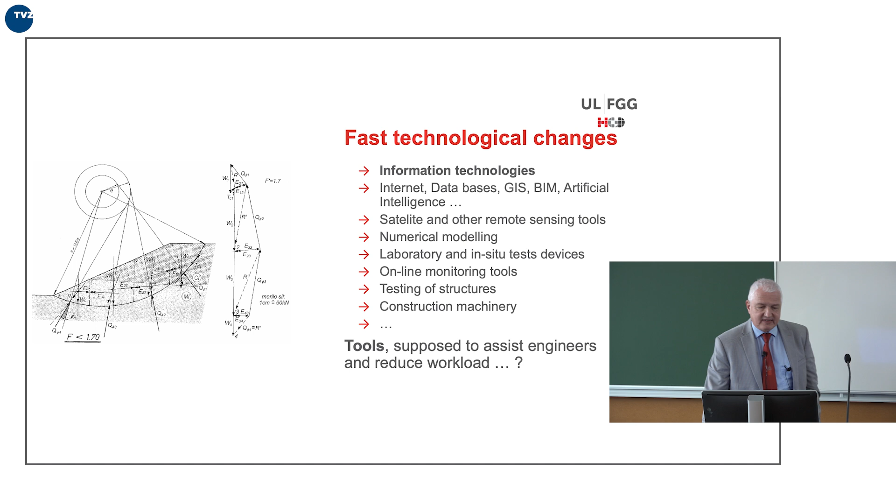So what do I mean by forensic geotechnics? It's basically about explaining why something happened and why the behavior of a certain geotechnical structure was different than expected, or why failure occurred. Why was the effect on nearby structures or pipelines higher than expected, or what caused a certain discrepancy or change in behavior or property. Forensic may also include legal aspects, court issues, so settlements of disputes.

This is something that I was involved in, not many times, but sometimes, and this is the least pleasant side of the story, and I will not talk about that. So the purpose of forensic engineering is basically to find the reason for non-compliant behavior, but also to get experience from documented past experiences for future projects. Usually, when something went wrong, we have to design the remedial measures, and when things go to court, attribute the responsibility.

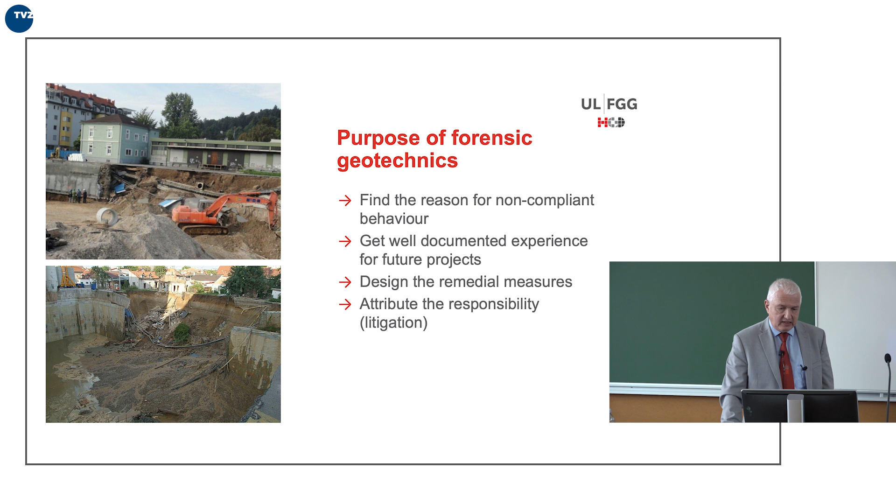We are here to keep the memory of great Professor Nonveiller, and I chose the topic on forensic geotechnics because there is a fil rouge of Professor Nonveiller's professional life, and it's the explanation of what happened in the Vaiont landslide, why this was triggered, and so he tried to explain the behavior.

I believe that most of you are aware, but I will shortly repeat this story and present the role of Professor Nonveiller as I see it, and I might be wrong because I didn't know him very well. Although I met him once in Ljubljana, he was there at the committee for a defense of a PhD thesis, so I was able to meet him at least once at the beginning of my career.

So Professor Nonveiller wrote about this major geotechnical disaster from '63. This disaster happened on the 9th of October in '63, and the same year he already wrote a paper, I believe this was in Građevinar. And until '92, so for 30 years, this event kept him busy.

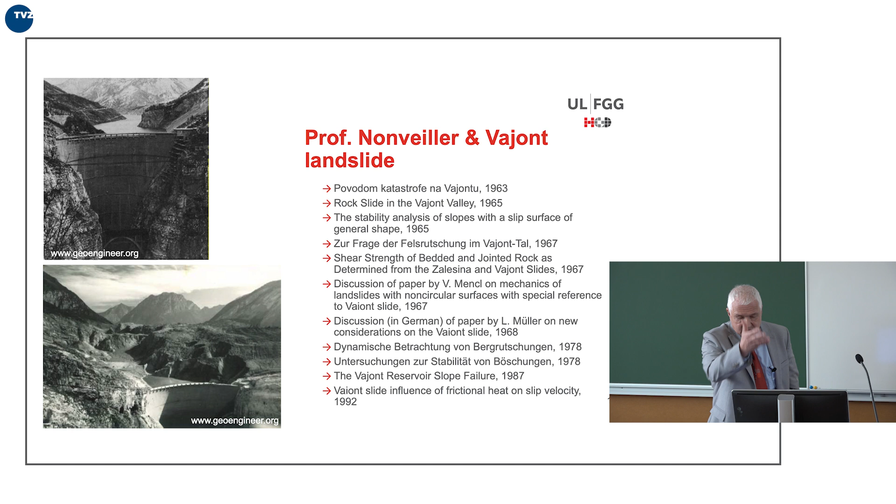And also he spoke fluently Italian and German. And since Austrian engineers were present and some reports were in German, and it's located in Italy, so there were also Italian experts, he was a perfect man, besides, of course, his professional knowledge. So he wrote 11, 12 papers on that which we can find listed in the beautiful book that our colleagues published.

And here you see the Vaiont Dam. It is a concrete arch dam of 262-meter height. And this is before the landslide, and this is after this disaster. So you can see that a massive amount of rock and soil slid into the reservoir. And you can see it here with the data.

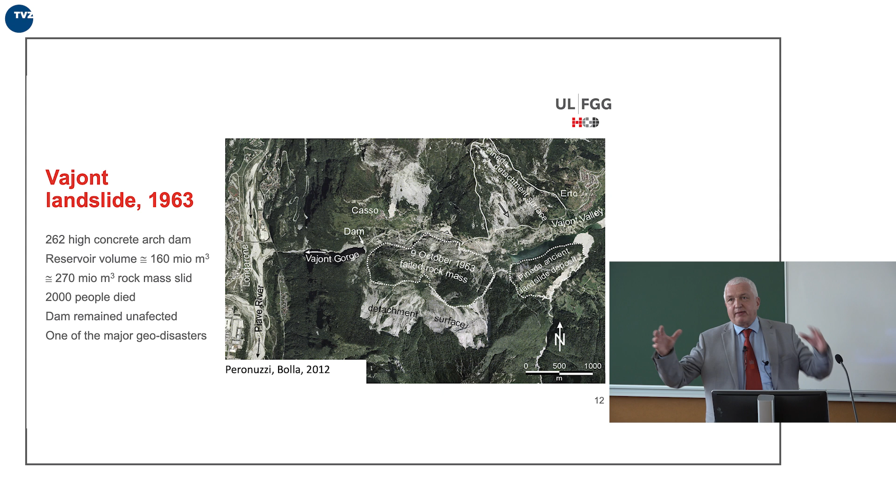So the reservoir was supposed to have 160 million cubic meters of water, and the rock mass that slid into this reservoir when it was not completely full, but close to that, displaced about 50 million cubic meters of water, and with the splash of water being supposedly 250 meters high, literally flushed away the village here. Here's the dam, here's the landslide, and here's the village of Longarone.

So it killed about 2,000 people. The dam itself remained unaffected. And this is still considered one of the major geotechnical disasters worldwide. It's still attracting interest of researchers, so there are still papers published on that. We have heard about the importance of engineering geology, so engineering geologists try to explain the previous situation, how the evolution of this space was, geologically speaking, what was here before and what was the cause of the landslide.

Professor Nonveiller went there, collected all the data, and analyzed them by himself. I think this is so important: as geotechnical engineers, when we want to explain what happened, we really collect all of the data available. Don't leave out any number. It may not fit at first into the picture, but we have to understand which data are correct and which are maybe misleading. And it's so important that we do this process really by hand, I mean use an Excel spreadsheet to make curves like this one presented in Nonveiller's paper in '87.

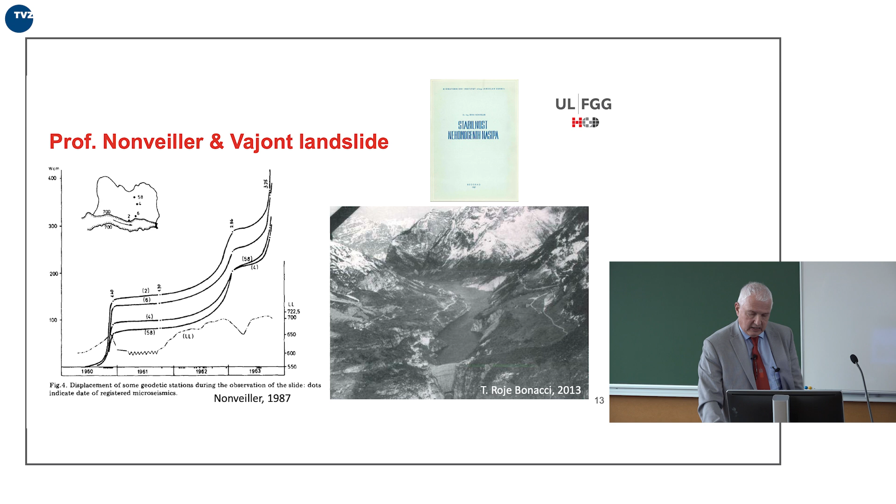There was also a nice paper from your conference in 2013 by Professor Tanja Roje-Bonacci about the role of Professor Nonveiller in explaining this event. So Professor Nonveiller was actually the first. Imagine, there was a project, the dam was constructed, they started filling the reservoir, but nobody did tests in the laboratory. Of course, the advantage of forensic engineering is that later he was able to see the material along the slip surface, take samples, and test them in the laboratory to get the material properties.

He was first to make a systematic stability analysis. And later, because one question intrigued him a lot, why this movement was so fast, he started to think that maybe the friction of a massive amount of material traveling downwards generated heat. Heat turned the water into vapor, and so there was a pore pressure buildup, vapor pressure buildup, and he also considered softening of the material along the slip surface due to this extreme heat.

And not only did he think about all this, but he developed an analytical method to calculate the rate, the speed of the traveling landslide, and came up with the final number. So it is amazing. We have already heard many things about Professor Nonveiller, but it really shows a man that was into the topic. He was fully engaged. He did thorough and systematic collection and analysis of data. He did additional in situ observation and laboratory testing on his own, with his group, of course.

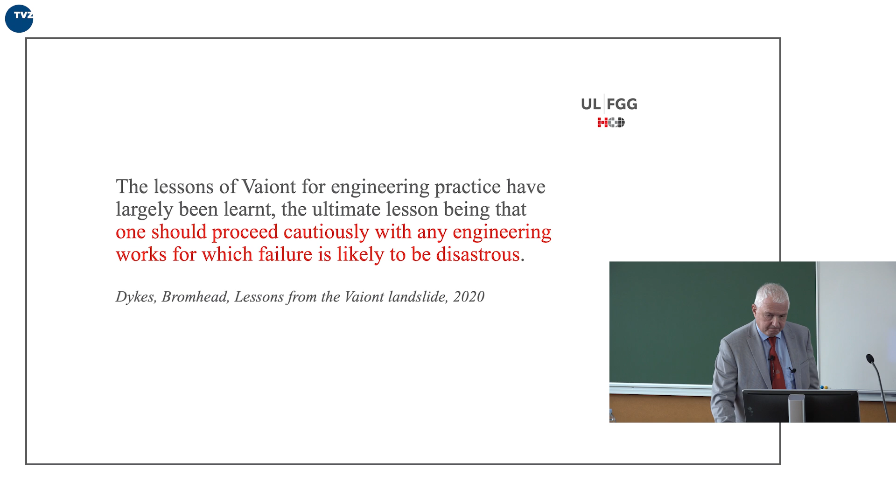Okay, now to the topic that we discussed in advance. So floods in Slovenia on the 3rd and 4th of August, well, till the 6th of August 2023. There was heavy rain, up to 300 millimeters in the whole 3 days, but most of this precipitation occurred within 6 hours. So 2/3 of the country was affected. Remember, it was August.

I was in Lukoran, on Ugljan, on my holidays.

It's not usual; we usually have this in autumn. Over 13,000 houses were damaged. 8,000 people were evacuated. 350 families have had to move permanently. 4,000 kilometers of watercourses were damaged. Nearly 2,000 kilometers of road needed refurbishment, and thousands of landslides were triggered. There are estimates of about 10,000, but it doesn't really matter. There are probably around 350 to 400 that will need some kind of attention and engineering approach.

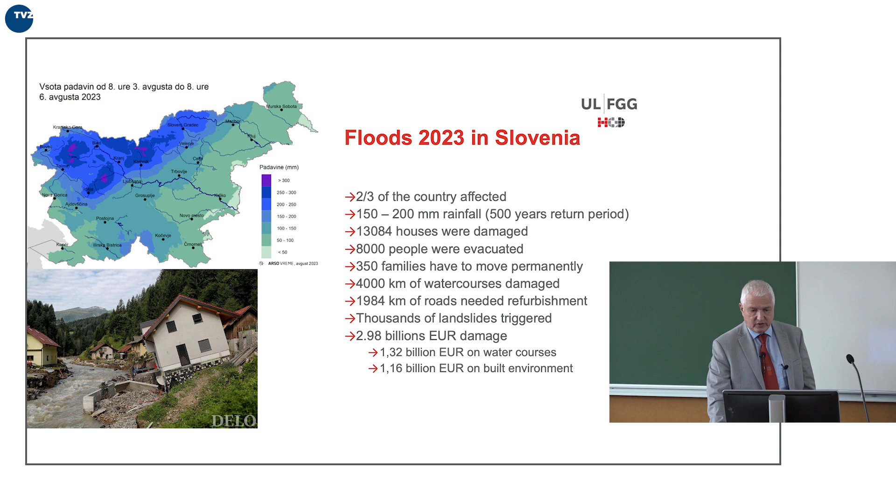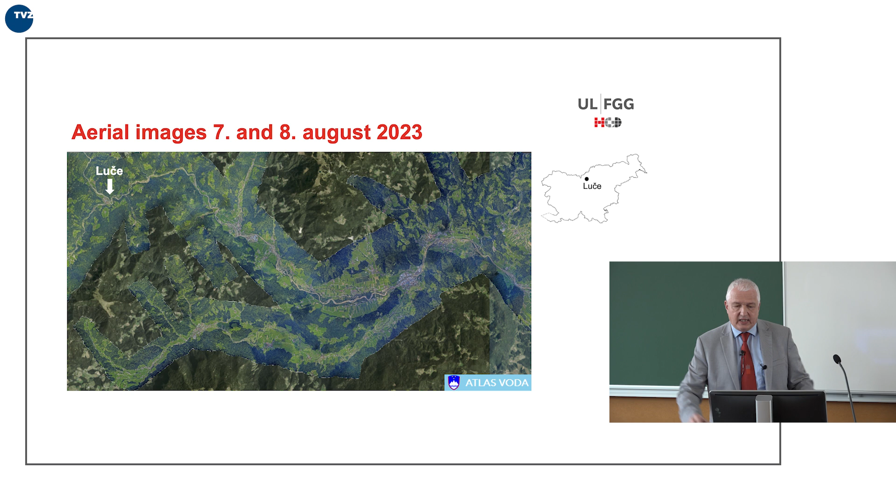So one good reaction of the government or governmental agencies was aerial imaging of all the areas affected. Along the watercourses, we can see another color of the photo. This area around the watercourses was documented using aerial images immediately, within a few days, on the 7th and 8th of August. So we have a frozen image in time, and we can always go back and see what happened within these documented areas.

Many of those don't affect anything, they're just in the woods or on free green fields, but some of them affect buildings, roads, and so on.

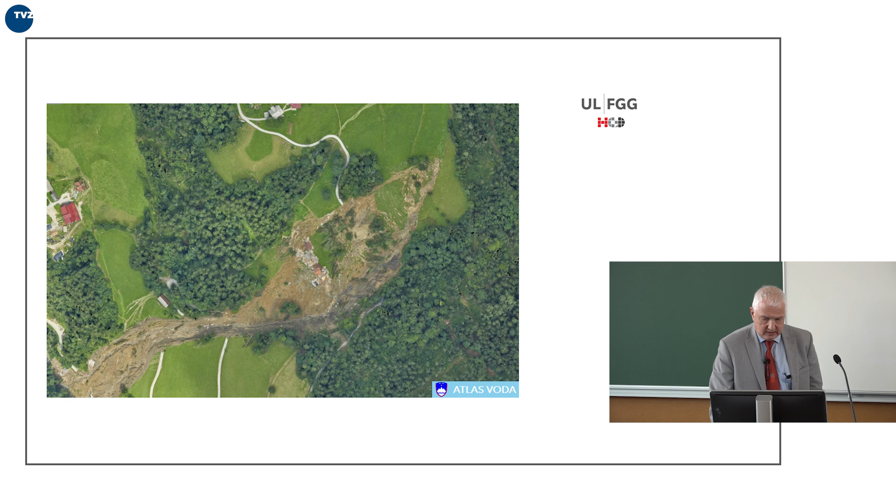At the end, the result for this house is here. And of course, the people had to move.

I didn't mention the reaction of civil protection, which was so good that despite the severity of the event, only, sorry to say so, only 4 people lost their lives.

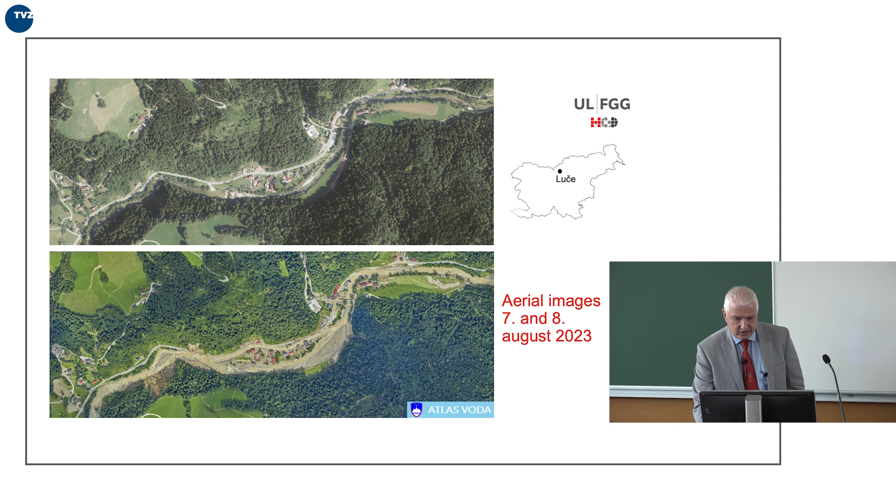A little more in detail: again, this is the location. This is the picture after the event, and you can see how the water split here into two different courses.

If you followed the news at that time, most of the pictures of these tilted houses came from this village. Well, the story is that this village wasn't here before 1950. There was nothing.

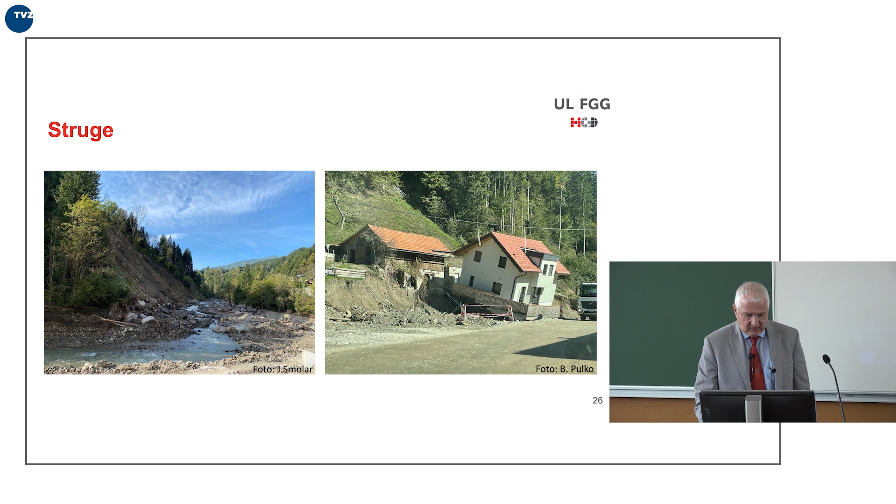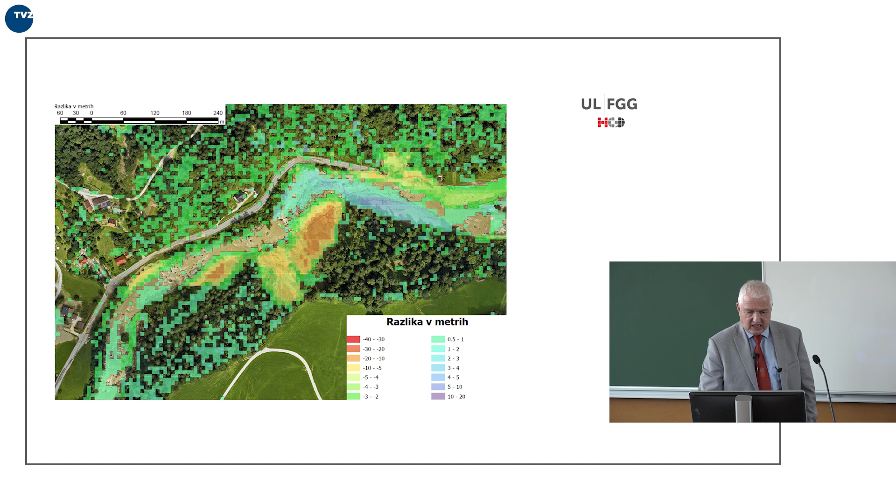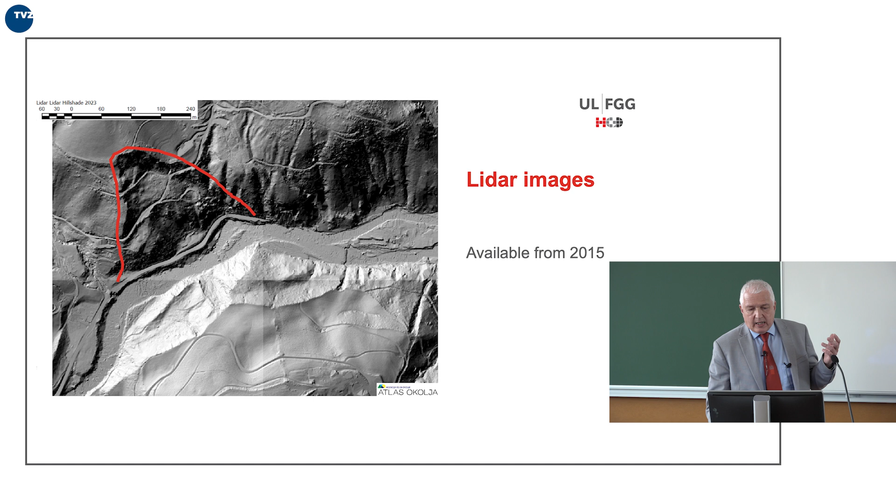LiDAR images are so interesting and good to use. We have the entire country of Slovenia covered with these LiDAR images from 2015, so now it's about 10 years old. They're now doing the second series of images, which will be available, I suppose, within a year.

And this is so good, you know archaeologists use this technology to look for ancient remains, since such fine details can be seen. Here we can see that the area from which this particular landslide was triggered is an old slide, an erosion process going on for hundreds of years or even millennia. This was just one event in a longer sequence in geological history.

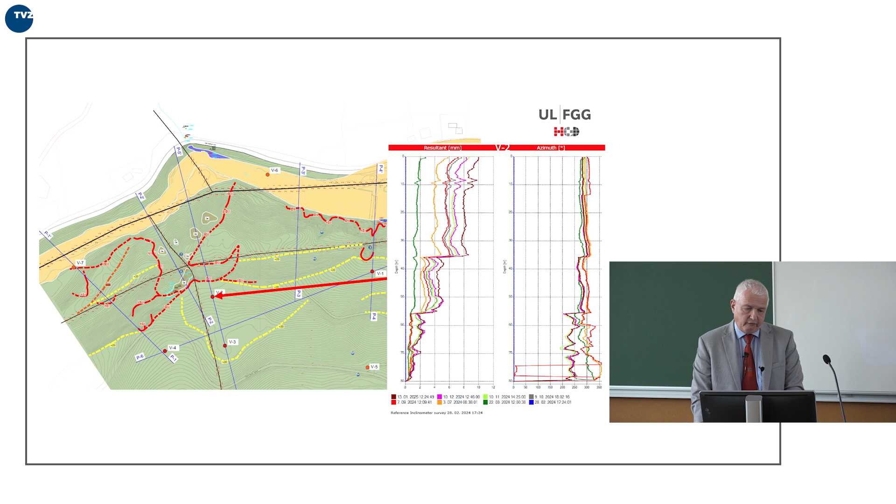It's a disaster in the eyes of humans. We can also see previous landslides using this technology, it's amazing, you really cannot miss it. These LiDAR images are great for our profession, and I advise, or better say, whenever I have to go to a site, I first consult all the publicly available data to see if anything can be understood from aerial or laser scanning images.

If I show you this location again, here, you don't see anything, it's just forest, you can't see it like that. You need the LiDAR image where the trees are filtered out, and then you can see the morphology of the ground.

This particular landslide was already investigated. Some 7 boreholes were drilled, and piezometers and inclinometers installed, and this has been going on for about 1 year. We can see, for instance, the image of the inclinometer here on the right side is located here.

It shows relatively clearly that, although there is a maximum of 8 millimeters of movement, there are probably 2 levels of sliding, marked here with the red line. The lower one coincides well with the expected slip surface, but there's another level of sliding about 20 meters higher. So one is at about 35 meters deep, the other about 55 meters.

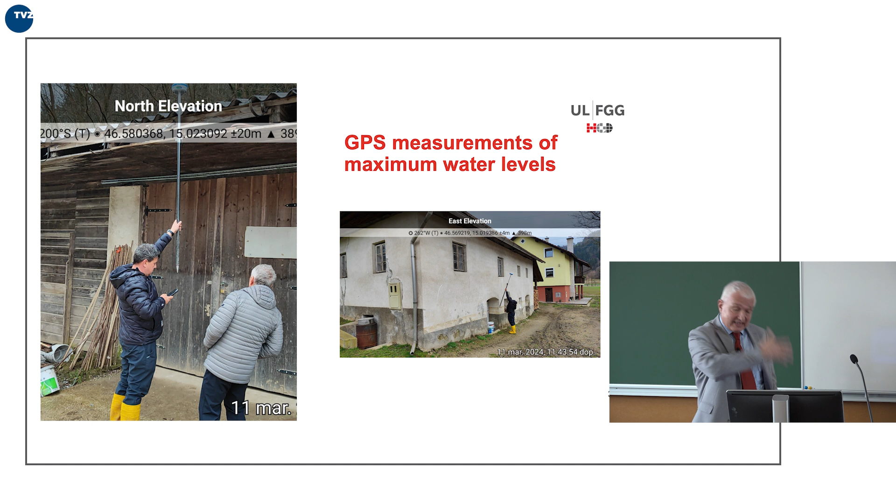Although today it's much easier - we have GPS devices, so taking readings and documenting them into databases is much faster today - but then it was done, and now it was not, which is a pity.

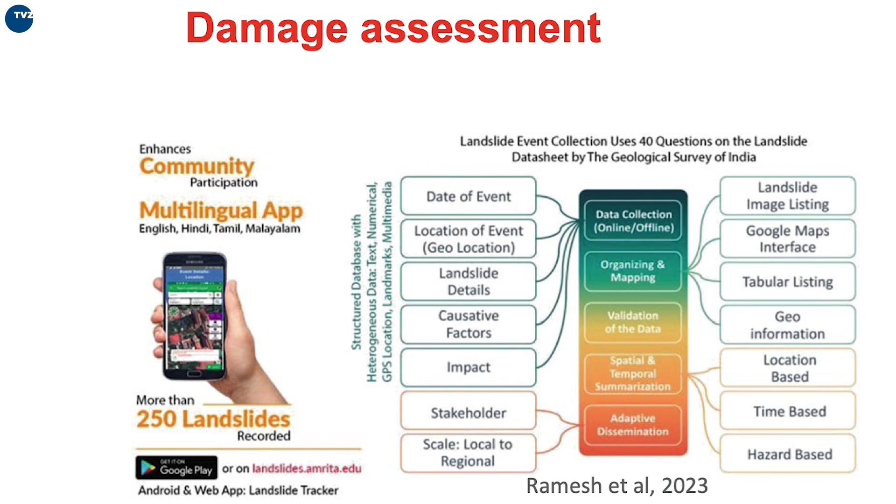So today, where we all have the gadgets in our pockets that can document location and take pictures, we didn't take advantage of that. Today you have apps for everything, and you can see here we have codes and technical options to document landslides or any disastrous events.

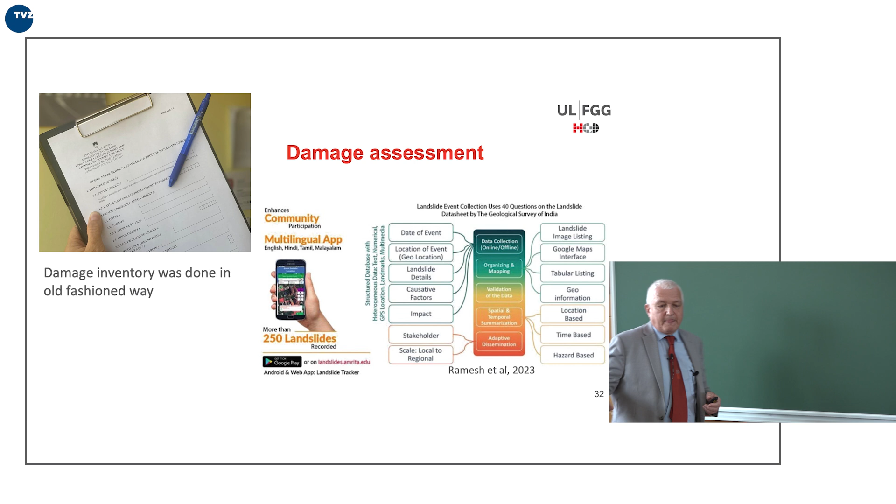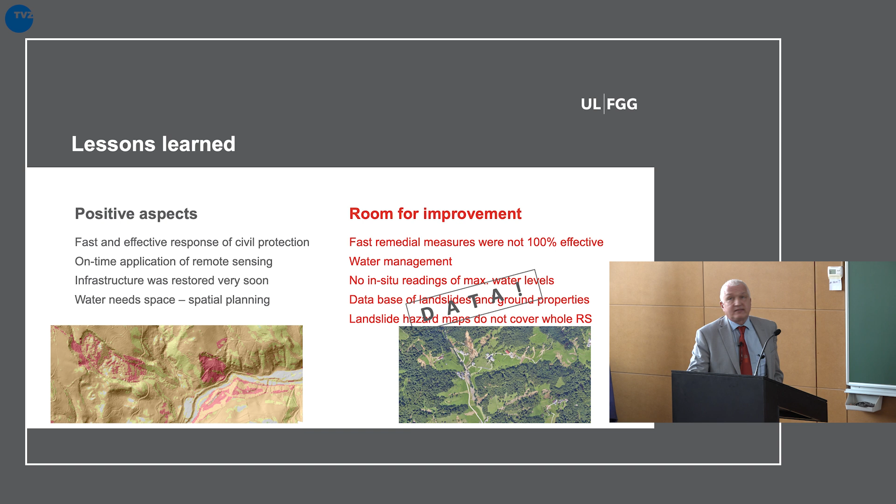So speaking about the positive and the negative, let's say I'll place the room for improvement - there is always room for improvement. Positive aspects were, first of all, fast and effective response of civil protection. This was so important, people were not left alone, and it was really effective. Then, on-time application of remote sensing, so we documented the situation.

This is good. The infrastructure, mainly the roads, were repaired very, very soon - trafficable again within days and weeks. And we learned that water needs space.

We cannot build our houses, factories, anything else - our built environment - and use all the space that was by nature devoted to water. Water needs space. It will take it anyhow.

My colleague Rok Fazarinc, a brilliant mind, says people used to say the old people know where we should or should not build. He says, well, it's not completely true. The truth is that what was not built in the correct location doesn't exist anymore.

So where is the room for improvement? Some fast remedial measures done by civil protection did not survive the next floods, which were much less severe, occurring just 2-3 months later in October and November 2023. So many of those failed. When something is done fast, it may not withstand the forces of time.

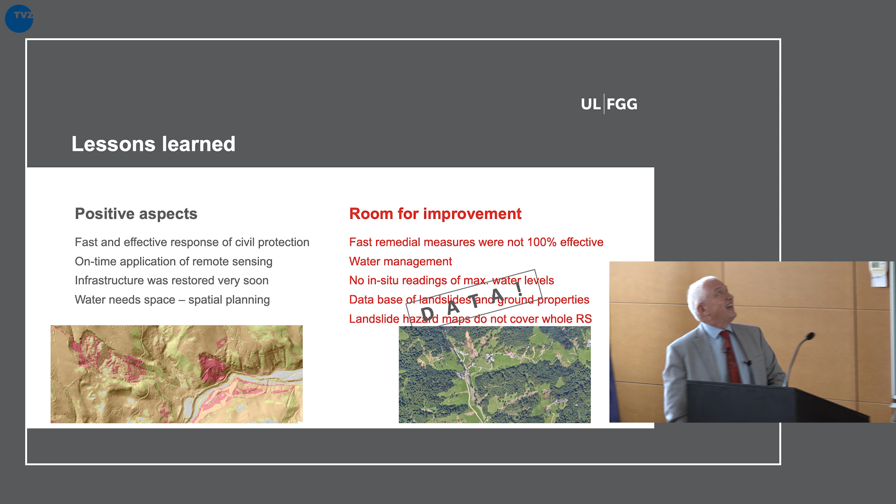I cannot come from Ljubljana without mentioning the marshland. So let's go on to the next slide.

So you know where Ljubljana is on the right side, and we have this yellowish area in the center, which represents the marshland. A few thousand years ago, 5,000 to 10,000 years ago, it was a lake. The upper 20 meters are filled with very soft lacustrine sediments. Geologically, this area is a tectonic sink, so the bedrock is located maybe 50 meters deep, filled predominantly with alluvial deposits, gravel, but the upper 20 meters are extremely soft.

On top of that, we have this nice new earthquake hazard map, showing design earthquake acceleration. Ljubljana is in the center. The new acceleration on the bedrock is

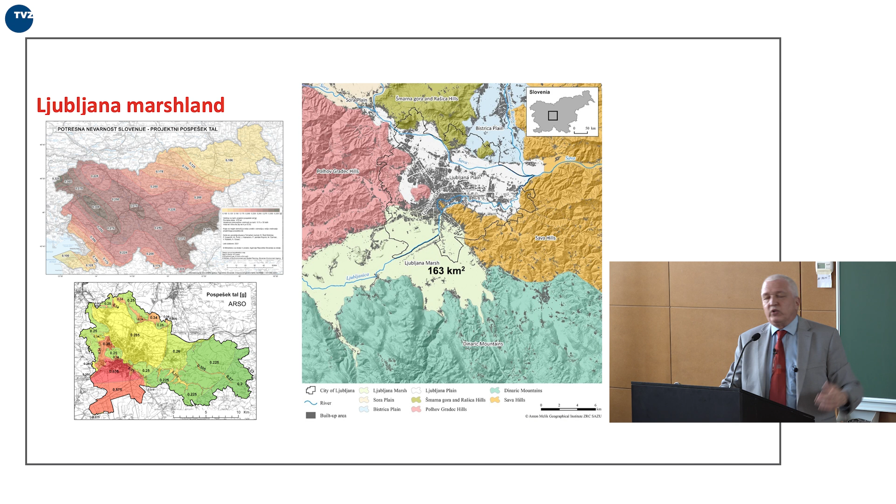0.275, which is a little bit higher than it was before. The map below is not an official one, but here on this southwest area, where this marshland is, colleagues from the Seismological Institute tried to anticipate the acceleration on the surface based on analysis of microtremors. These are extremely small strain vibrations, and the method is based on elastic behavior of the ground, which for such a soft soil is of course not true. But in this way, they came up with a prediction of maximum earthquake acceleration on the surface between 0.2 and 0.6, which is extremely high and definitely cannot be true.

To see how soft this material is, this is a reproduction of a slide made by Boštjan Pulko, but the measurements were done by Anna Gabrc, who is here with us, on the Ljubljana Ring motorway.

They did test embankments - do you still have that option in Croatia? Because in Slovenia, they don't give us the option to do test embankments, test cuts, whatever test. You can test piles, test anchors, but testing the geotechnical structure as a whole, forget it. They say you have all these fancy computer programs, you can do everything.

So about a 5 meter high embankment settled for close to 3 meters. The initial pore pressure, void ratio of this material is around 3, so the moisture content would be over 100%. So this is how soft this material is.

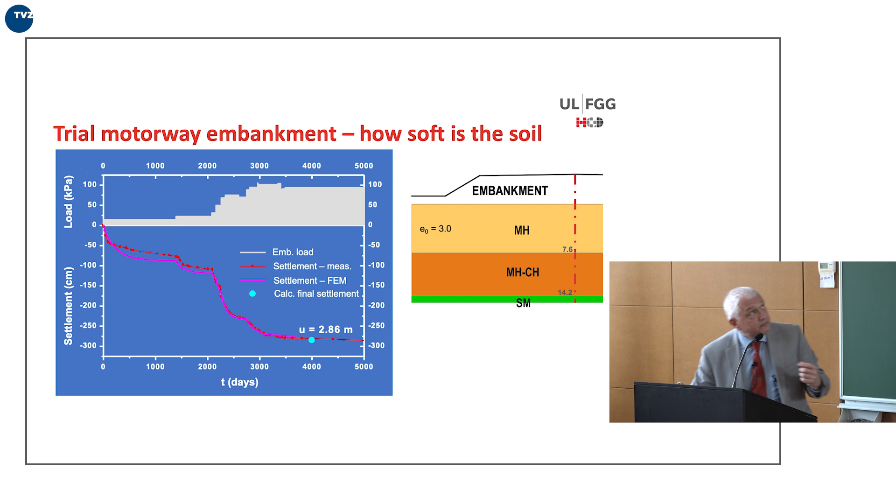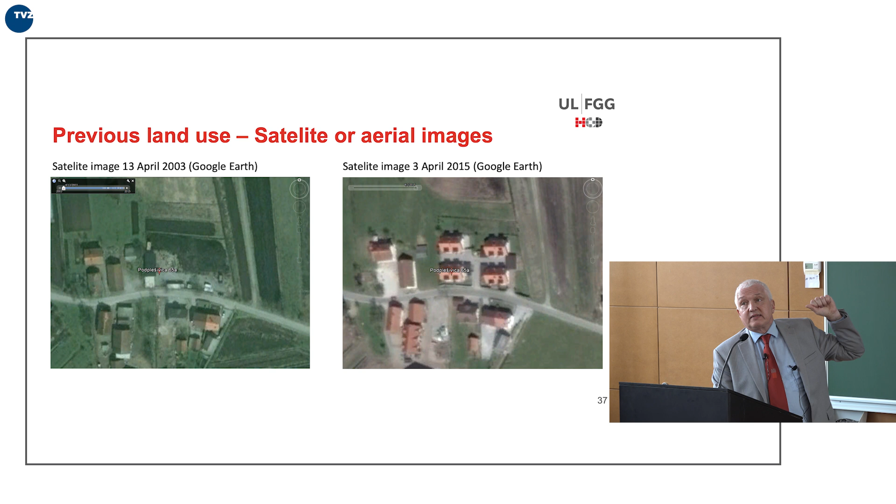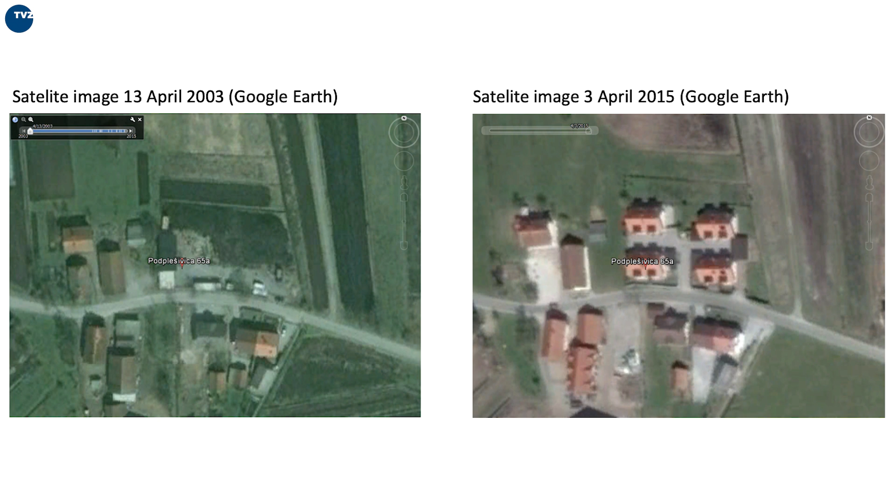From this very soft material, there are a number of anecdotes, actually. This one was not an anecdote, but a real court case. We have these 4 buildings here, and 3 of them perform without any problems. And this one started to tilt, causing the inhabitants problems - windows don't close, and so on. Then we were asked to try to understand what happened, why this is wrong, and attribute the responsibility. At first, we didn't understand.

It was quite nicely done for the private buildings. Each of those had a borehole - well, the borehole without laboratory test, we know it's not quite a lot of data, but at least they tried to do something. So the only thing we were able to do within the budget was to consult Google Earth.

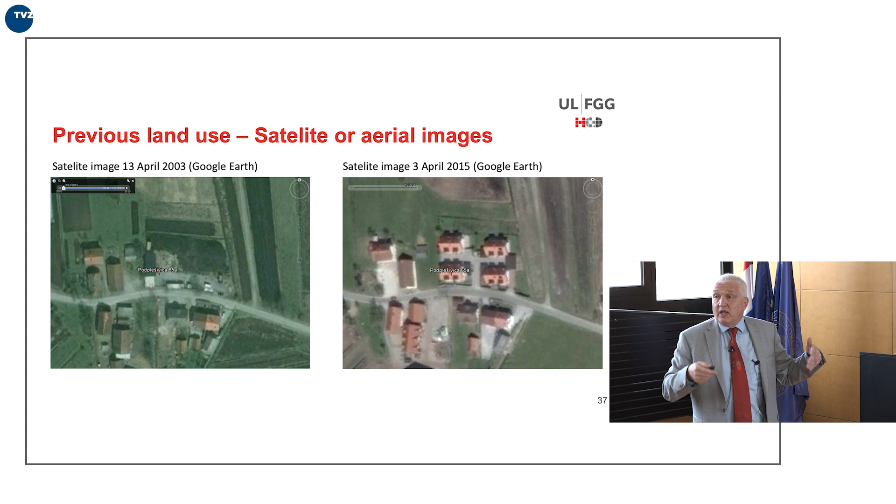And we saw that some years before - you see this mark? This mark is here. There was a previous building, and here was a parking place. We talked to the people, and they said, well, here was a guy having these heavy trucks that were parked here together all the time. So what does it mean? The previous use, the previous loads on this very soft soil caused some consolidation, some previous settlement of this area under part of this building, and the rest was not consolidated yet.

So on such a soft soil, it's so important to understand the previous use of the location, and this load history of the area under this building caused later unwanted behavior.

Today we have this beautiful tool - I don't know if you know it or not - the European Ground Motion Service. It's actually a radar interferometric analysis of satellite images in the radar spectrum. Europe has two satellites, Sentinel-1A and Sentinel-1B, and this is a public service. You can just search European Ground Motion Service, and then you will get this data.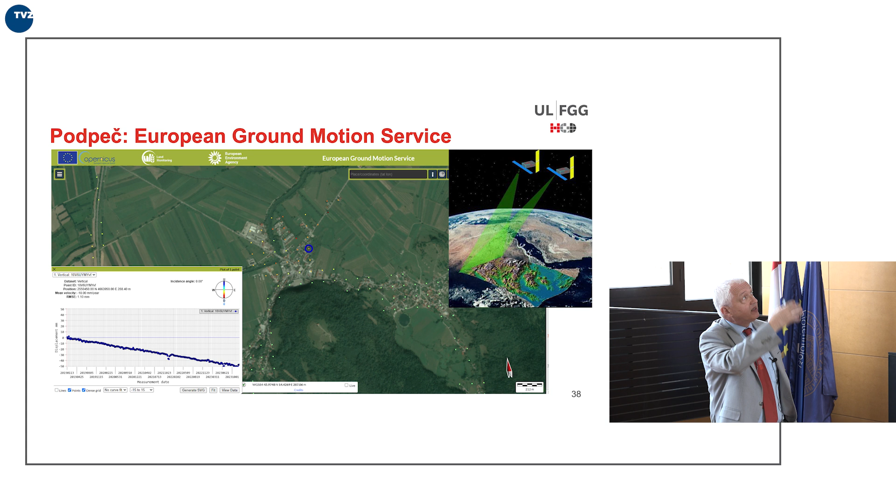Why am I showing these locations? Because right now here is a construction site with some tens of new houses. The owner, the client, didn't want to put these houses on pile foundations, on deep foundations reaching the higher bearing stratum. Later on he wanted a confirmation, he wanted the contractor to promise that after he hands over the buildings to the future owners, there will not be more than 2 centimeters of settlement.

And the contractor went to me and said, well, how should I react? And I just showed him the first point adjacent to this construction site and said, all right, look, this is the natural behavior of the marshland here. It's 1 centimeter per year. You do nothing, you have 1 centimeter per year. And now you imagine, what are you going to sign? I don't know what the discussion was later. The construction is going on, and well.

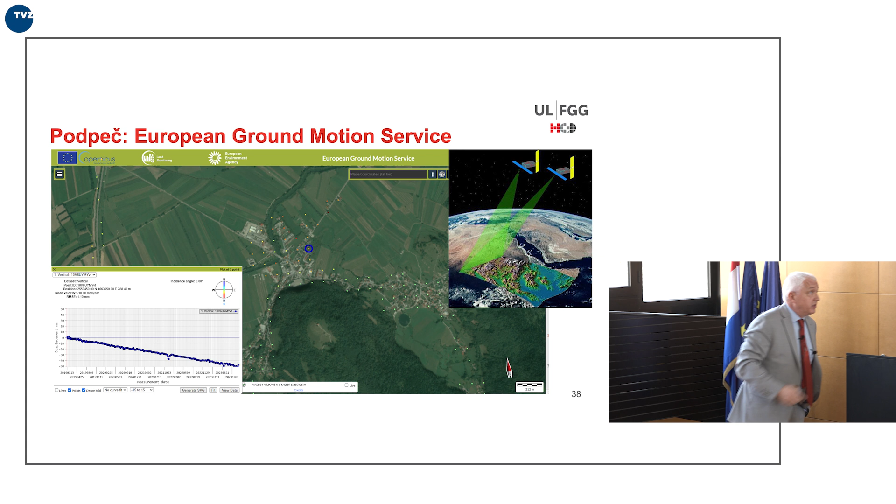Speaking about some new technologies, I know that the flat dilatometer test is also used in Croatia, and with the addition of the seismic unit, you can measure also the G0, the shear modulus at very, very small strains. You get quite a good first profile of stiffness and strength, and then of G0.

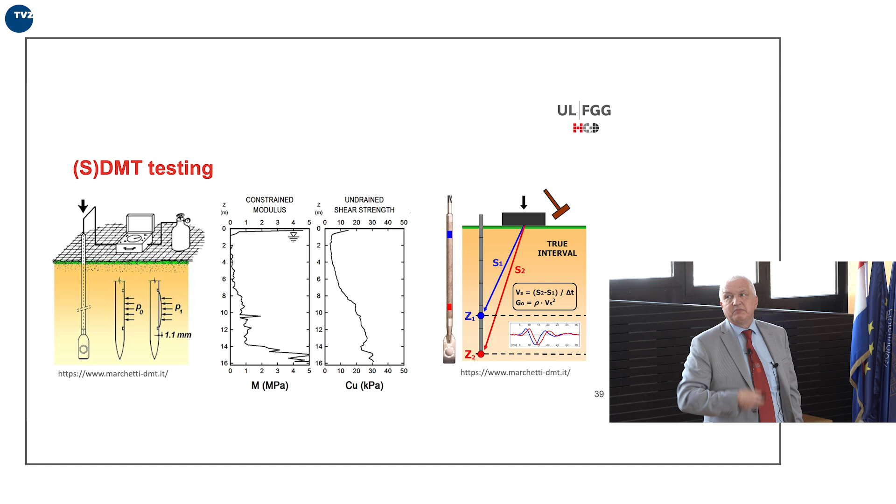So this is probably one of the best tools that we have, at least for soft soil, clays, silts, and sands. We can have a whole profile. The measurement is taken every 20 centimeters, which gives you a good profile, together with a few laboratory samples, so you can compare and see. You can do a very good prediction, even about the future sometimes.

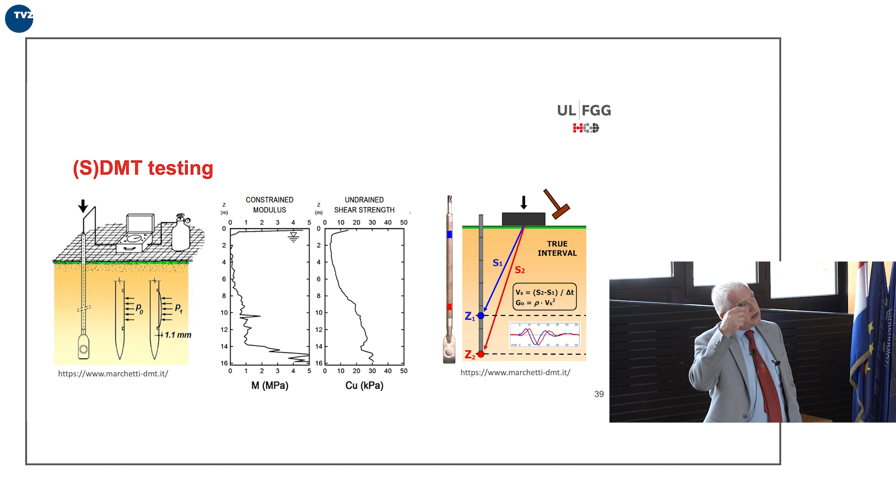Well, and I cannot resist mentioning the resonant column test device that we have, and the work of our PhD student, who is also ill and is not here, Timotej Jurček.

Our idea was, as I showed you initially, we have very soft soil, something special, not too extremely special. There are even softer soils in the world, but for our region, I think it is one of the interesting places. And we have high seismicity, so we really wanted to know how this material behaves in this small strain range. And the question was, how does this stiffness decay curve look like? Because based on these two curves, we can anticipate the amplification of earthquake acceleration traveling from bedrock to the surface.

This curve can be described by this analytical expression, and the only parameter is actually gamma 0.7. What is this gamma 0.7? It is the shear strain at which G0 is reduced down to 70%. So I will just give you the result. We have a set of proposals from different researchers on what this gamma 0.7 should be, based on investigations of different soils. And we have mostly used this EPRI curve, this one.

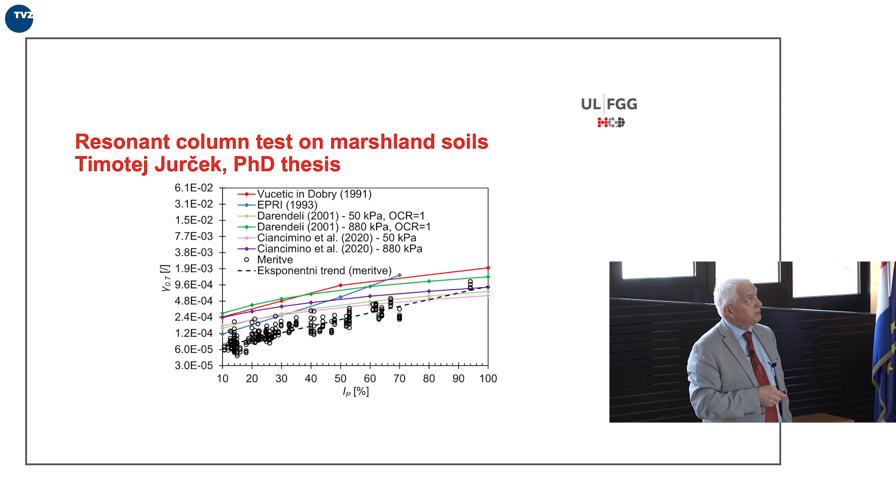Sonia mentioned that I did some work on ground anchors. And again, just a short introduction so we can follow the further slides. Ground anchors are tested. Actually, each ground anchor is tested, and by different tests. So you have acceptance tests, suitability tests. So the investigation of an anchor is done in several stages of loads, and at each stage of load, the force is maintained constant, and then at the anchor head, the displacement is recorded.

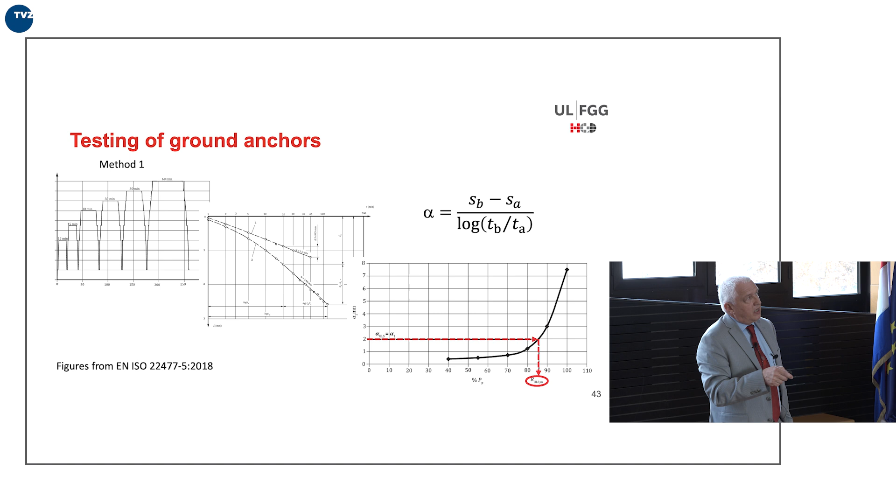And if we plot it against the logarithm of time, then we can calculate this so-called creep coefficient alpha, so difference in movement divided by difference in logarithm of time. The bearing capacity of an anchor is determined as the force leading to a creep coefficient equal to 2. So a creep coefficient equal to 2 means we are at the limit of the bearing capacity. We have achieved the bearing capacity.

And now again, forensics, yeah? There was a construction site, and it was a particular one. It was in the Flysch region where this kind of construction was designed. So we have these prefabricated reinforced concrete elements. Each of those had the place for one anchor, and since the earth pressure was relatively low due to good properties, the designer decided to use 2-strand anchors, so just 2 tendons, 2 steel strands for each element.

When we do testing of anchor behavior before the systematic installation of them, we usually try to see how much bearing capacity we can achieve, and we usually add one further tendon. So these were 3-tendon anchors tested, and these are the 2 triangles. Effective free length against the creep coefficient. So the creep coefficient was around 0.6.

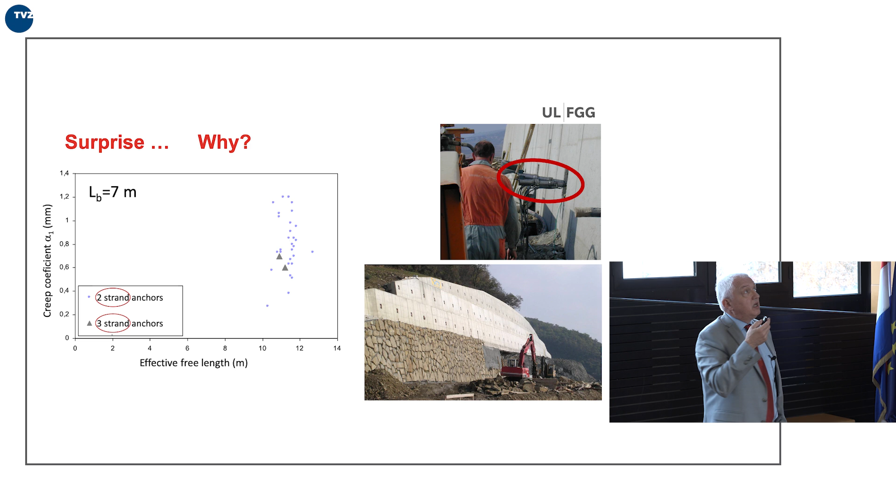When they started to install the regular anchors having 2 strands, they got all this range of creep coefficient, even going up to 1.2, which was by the design not acceptable, and they asked what to do. Well, these anchors were installed, they worked perfectly, no problem. But the question remained. So it was triggering. Why those numbers?

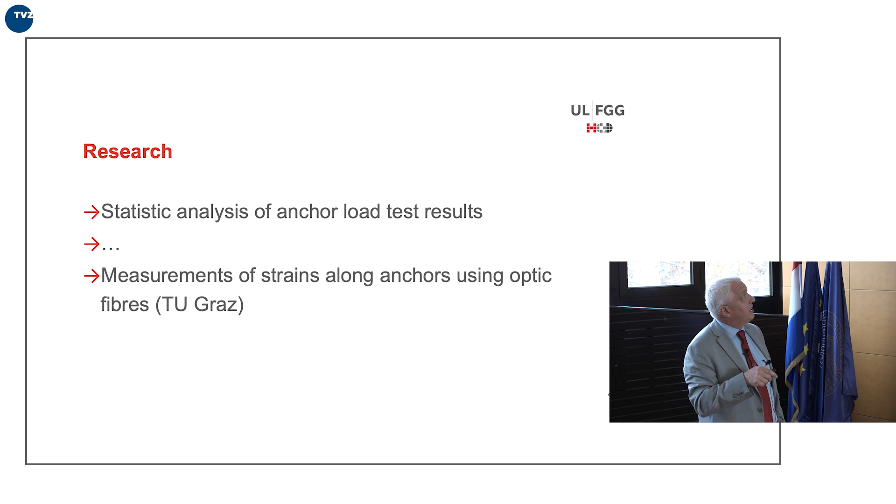So we went back, collected a lot of anchor test results, did a statistical analysis, and then we were happy enough to be able to at least remotely participate through this bilateral research project, a minor one, with Technical University of Graz, who did some tests. So let's see first this statistical analysis of anchors. So what we did is a regression analysis.

So creep coefficient was written as a function of force, of free length, of bond length, and of number of strands, number of steel tendons. And all these factors that resulted from this regression analysis were statistically significant, highly significant. So no doubt that this is valid. For anchors, if we take now as a reference anchor the one having 4 strands, 15 meters free length, 7 meters bond length, and 800 anchor force, this equation would give the result.

So one additional strand, so instead of 4 having 5, will reduce creep coefficient by 49%, which is interesting, isn't it? 1 meter shorter bond length reduces this factor by 12%, and even free length, which shouldn't have any effect, well, reduces it by a negligible 1%, but has some effect.

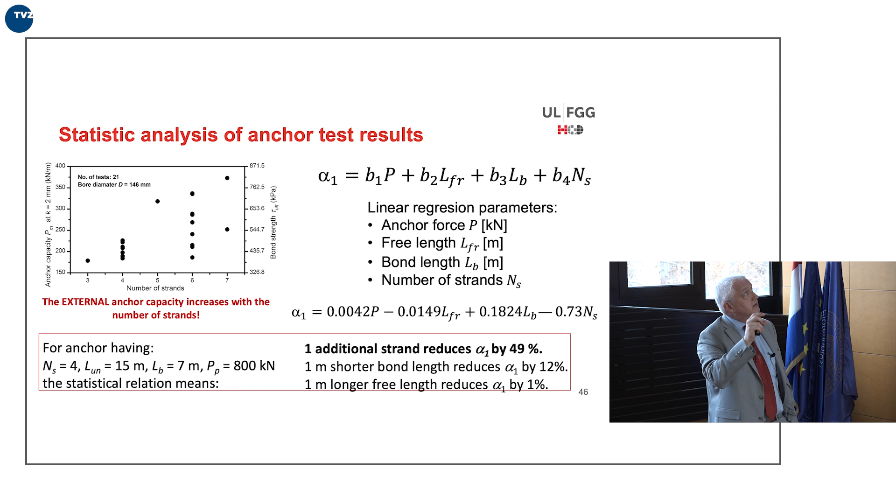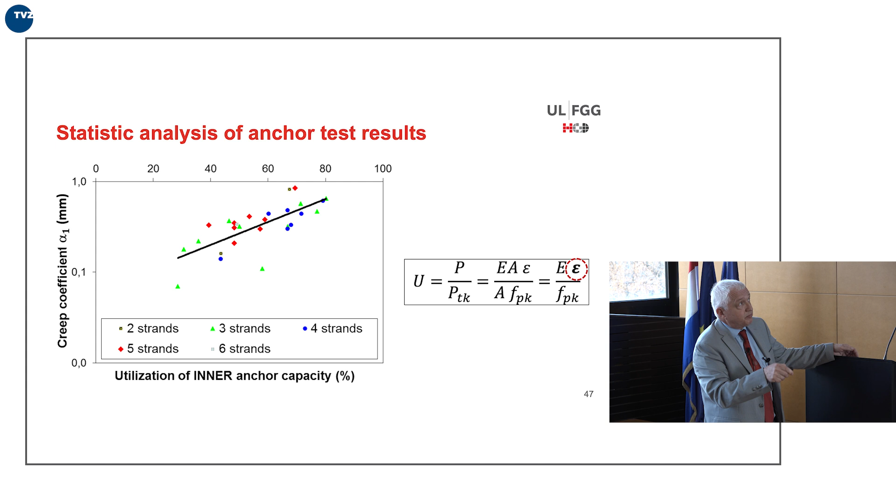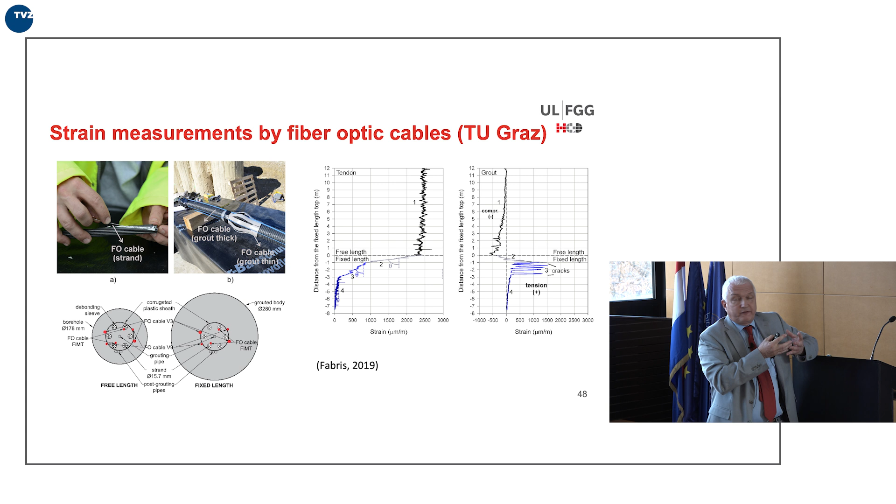If we have a look at what this utilization factor is, so I said force divided by cable strength. Cable strength is area multiplied by strength. Force is a function of strain, actually. And finally, we see that we have 2 material properties of steel, and the rest is strain. So measuring the strain could tell us something. And the colleagues in Graz had the chance to install fiber optic cable along the tendons and within the grout body outside of anchors. And these are the results.

So fiber optic cable can serve as a strain sensor. Each centimeter of the cable can serve as one piece of sensor. So we get the data along each centimeter of the anchor, which is perfect. We did previously some measurements with strain gauges, but a strain gauge is installed once a meter and will never give you the same result.

So along the tendon, we see what is expected. More or less constant force, a little bit of decrease here at the end. So, let's say, a constant force within the free length, and then rapid reduction within the bond length down to 0. Well, this is expected. Nothing spectacular here. More interesting is this one.

So we see here in this area where the load is obviously transferred to the ground, we see these ups and downs. This is actually cracking of the grout. And we see, which is also clear from simple statics, that we must have some compressive stresses and strains along the free length.

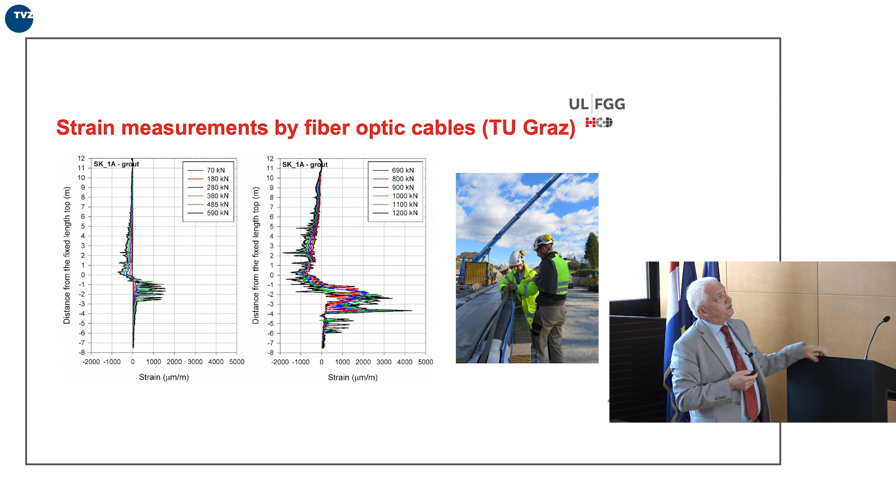So I would say, if we used, instead of grout, a material that does not crack, what would happen? That's a question that can lead to further research and further improvement of, first, understanding and then utilization of anchors.

The more or less last case history: it's a deep excavation in Ljubljana next to a historic building from the monarchy. It was a military structure. So this is this military structure from the 19th century, and this is the new, now already constructed building. But at the time that we were involved in the project, there was a construction pit under execution, and here is this military object. Now it is a school.

So this historic object is over 130 meters long, not so wide, and has 3 stories and the attic, so it's less than around 20 meters high. The construction pit is 13 meters deep, and the retaining structure was designed from 127 jet grouting columns, which were 25 meters deep, 2 meters in diameter, at a spacing of 1.8 meters. Subsequently, during the excavation, they were anchored by pre-stressed ground anchors in 3 levels.

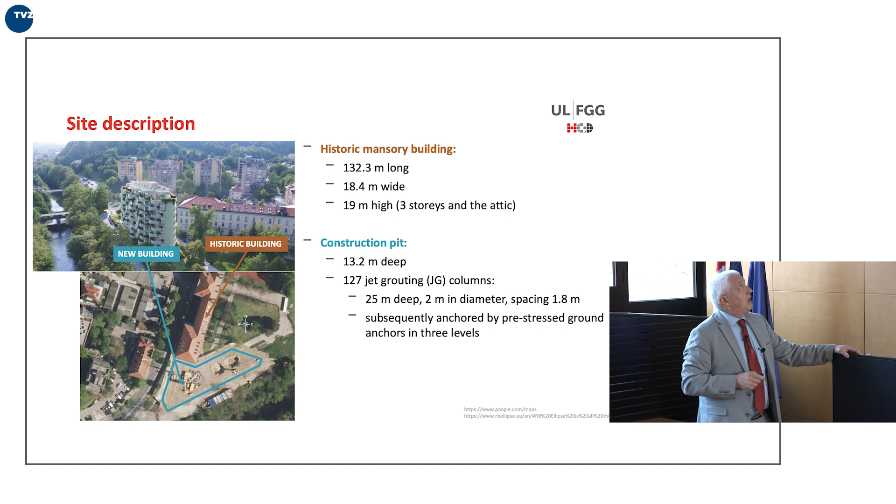We were invited to this construction site when, on 16th of March in 2021, the people from the school informed the contractor that the building started to crack. They had a 0 reading of some benchmark points before the start of construction. Let's only consult those 4. There were more, but these 4 might be important, or 3. So they immediately went to measure again, and they saw that the points that settled most showed a settlement of 37 millimeters. So this was 1 month after construction.

85 jet grouting columns were installed, and those last 5 installed on 16th of March should supposedly cause this cracking. At first, it seems reasonable. We have installation of jet grouting columns immediately adjacent to the building, so one can believe that this can cause damage to the building. But soon after, when they inspected the whole building, they saw that these cracks extended up to 90 meters away from this point. So this cannot be only due to these 5 jet grouting columns.

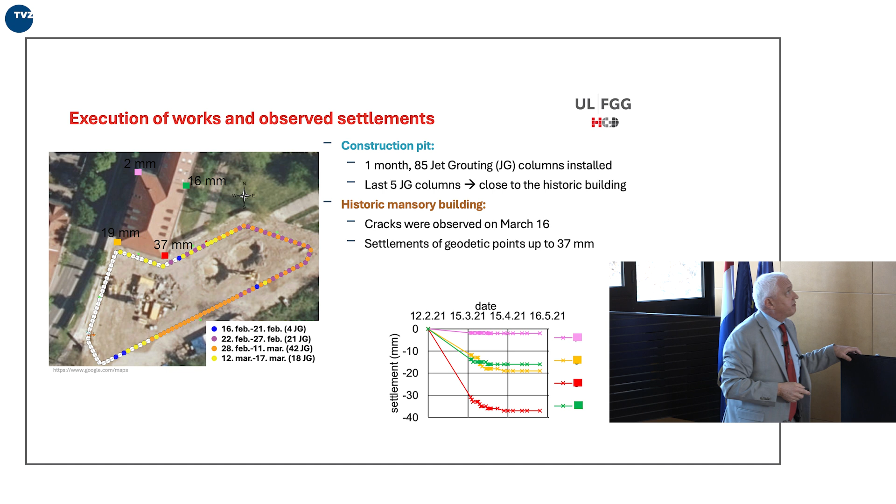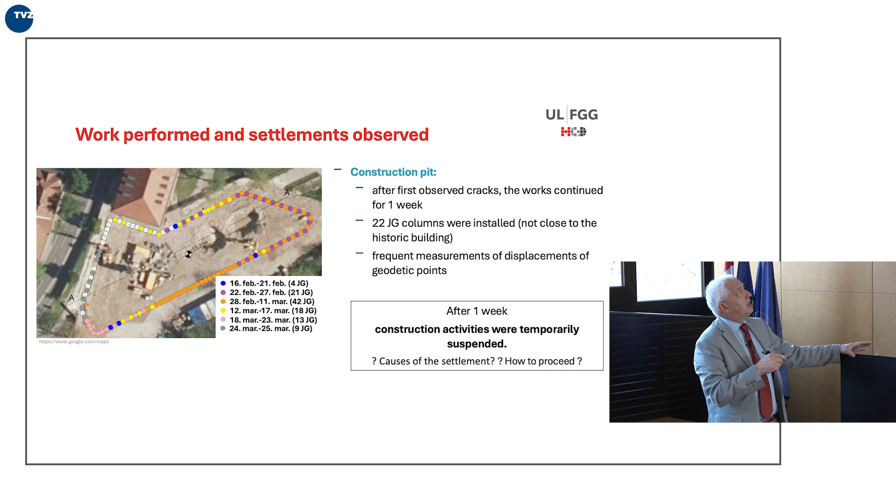But we didn't have anything to take into hand. We only had the 0 reading and the situation after 85 jet grouting columns were installed. So construction then moved from here to this corner. An additional 22 jet grouting columns were installed in the week after that event. And then the authorities, on the request of the school owners, stopped the construction site. They closed it.

What is the ground composition? So we had these 4 boreholes from the design stage, then 2 additional boreholes were made, and this is a picture of the material that was in the end believed to cause the problems. This is a very soft, loose, silty gravel. And on top, we have 10, 11 meters of very, very dense, clean gravel. So a very dense layer, then some intermediate layer, then very soft, very loose silty gravel, and then the bedrock. Bedrock is at around 25 meters, so all the jet grouting columns went down to this bedrock.

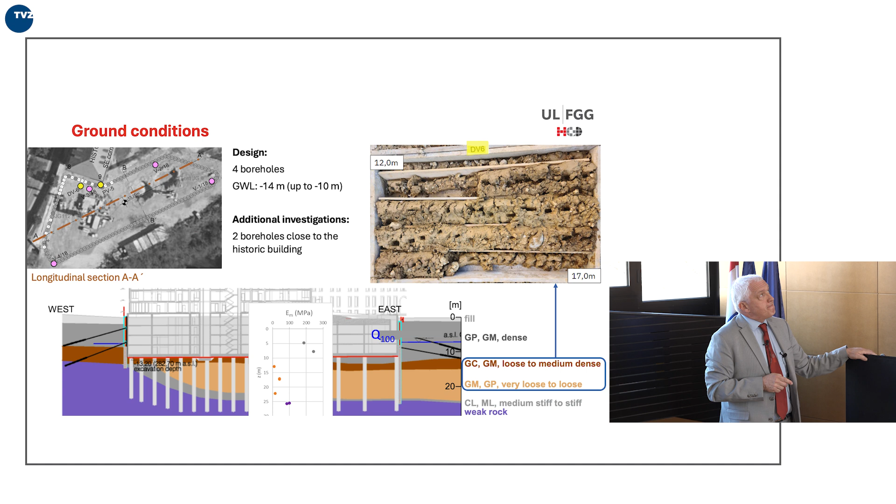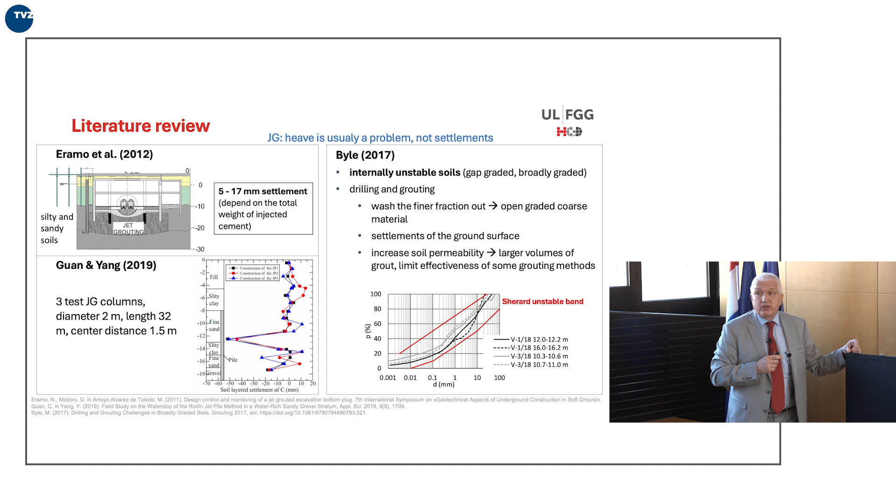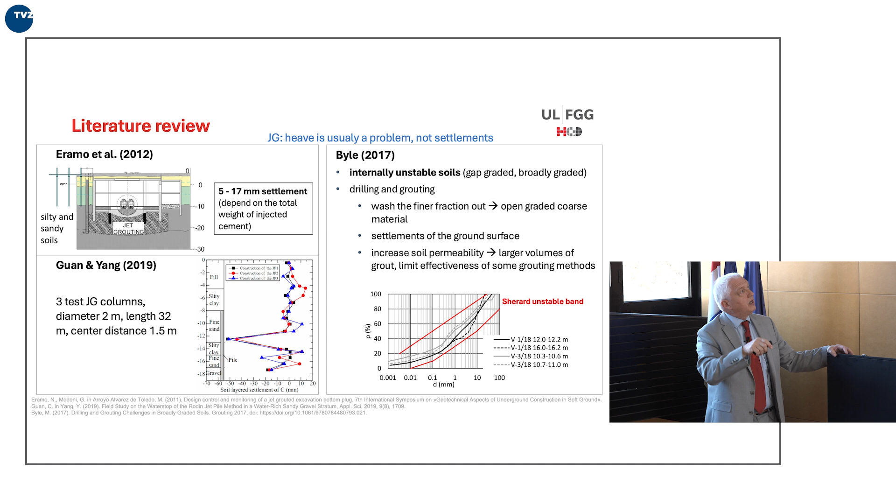So what do you do? You go and consult the literature, and we saw that most of the literature would say that when you do jet grouting, you should be afraid of heave. And here we had settlements. We found just 3 papers speaking about settlements connected with jet grouting. The first one, additional mass, additional load. Well, this was not the case here. Then there were 2, one showing 5 centimeters of settlement in some fine sand on a relatively thin layer. And then the one talking particularly about these loose, silty, clayey gravels, which were known to the author to potentially cause problems with drilling and grouting procedures. So this was one thing that we did.

We did a 3D analysis that showed some difference from 15 to 16 March due to these 5 jet grouting columns, but did not satisfactorily answer all the questions, particularly due to the massive, large construction site and the need for a bigger model. It was impossible to model everything.

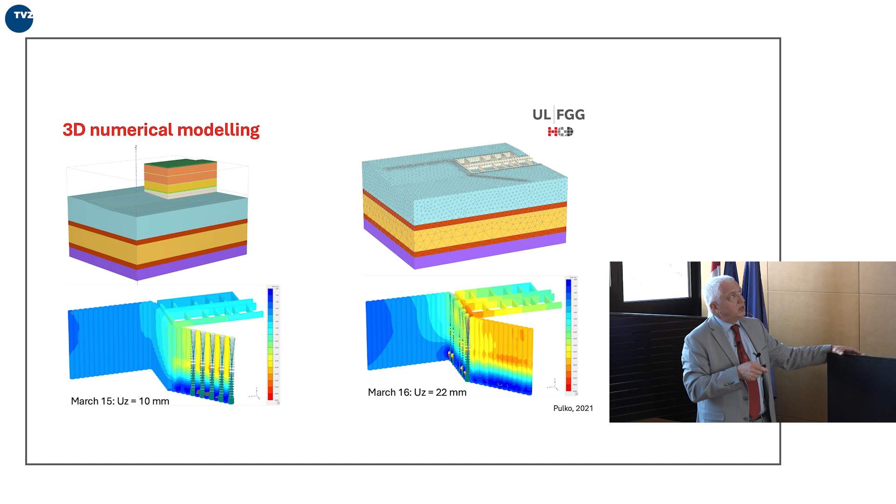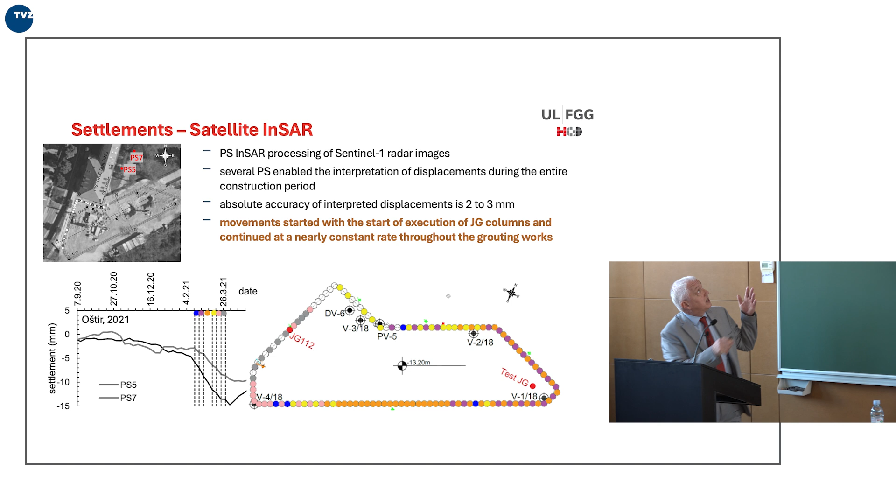And then we have a colleague at the university, a professor who is a physicist, who is able to analyze satellite radar images using interferometry principles. And we asked him, can you have a look if there are some points observed by satellites that can be used for the interpretation of this event? And yes, indeed, he was able to locate 2 points, so-called permanent scatterers, that were monitored throughout this period. And we see that there are negligible or minor settlements before the construction started.

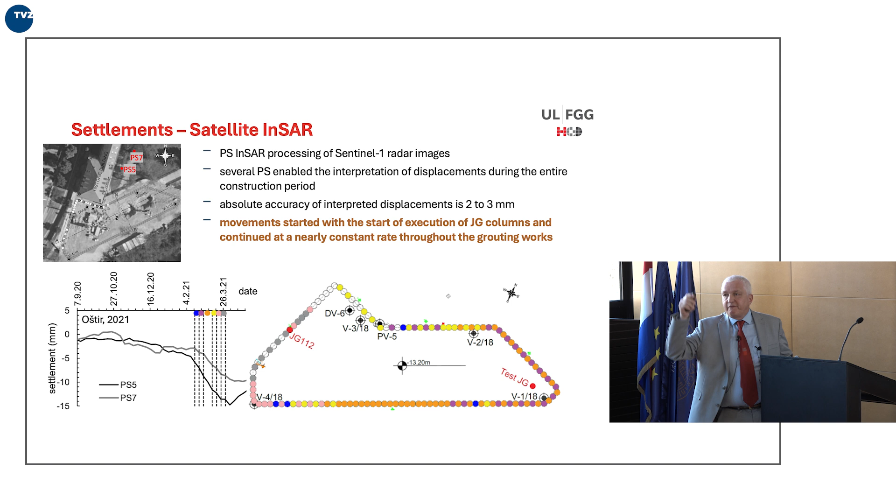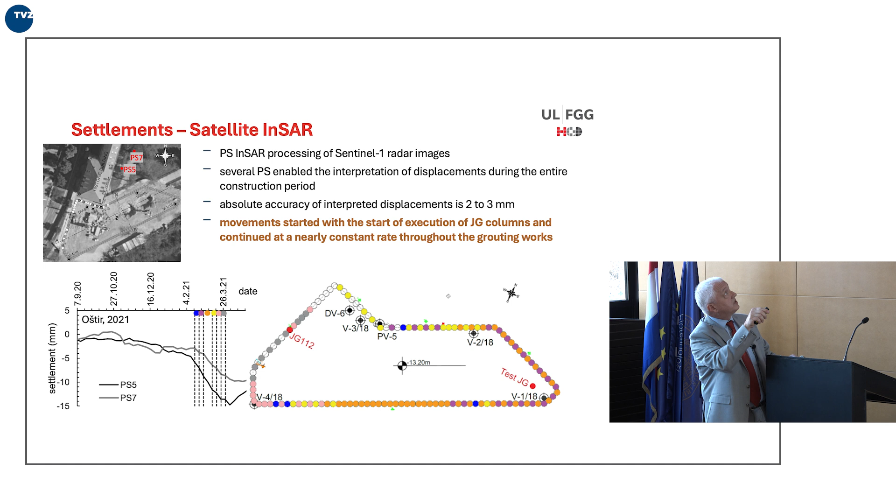These lines with colors are connected with these colors here, so we can see which jet grouting columns were constructed each week. But what we can see is that the settlements started from the first day of construction, and they persisted throughout the time. So there's no sudden movement on 15 or 16 of March. It was constantly going on. 15 millimeters here, and this point is located next to this point, which geodetically determined 16 millimeters.

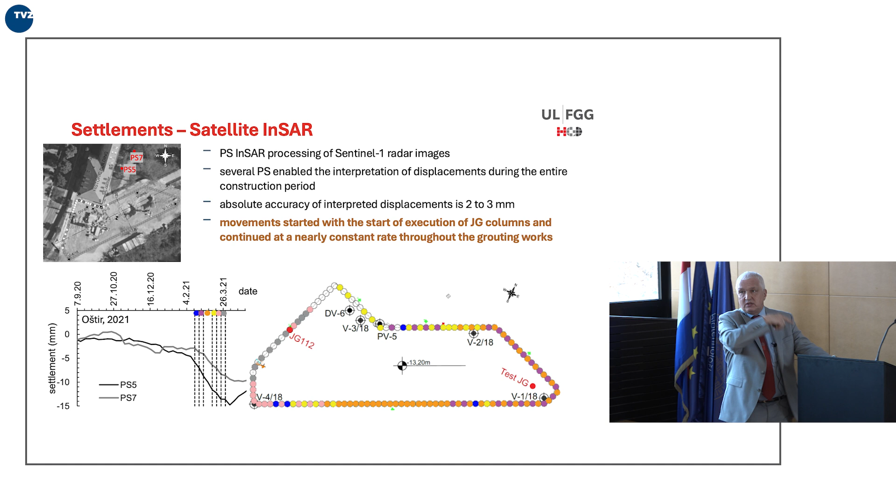So this coincided very well. So we were happy to understand that not these 5 jet grouting columns caused the cracking of the building, but the entire construction sequence, the procedure from day to day, was participating.

And then we did the test. We said, well, let's make 1 jet grouting column here and see the influence on the building. And we were particularly interested, so we monitored with this leveling stuff, we monitored settlements during the execution of one single jet grouting column. And we repeated it here with another jet grouting column.

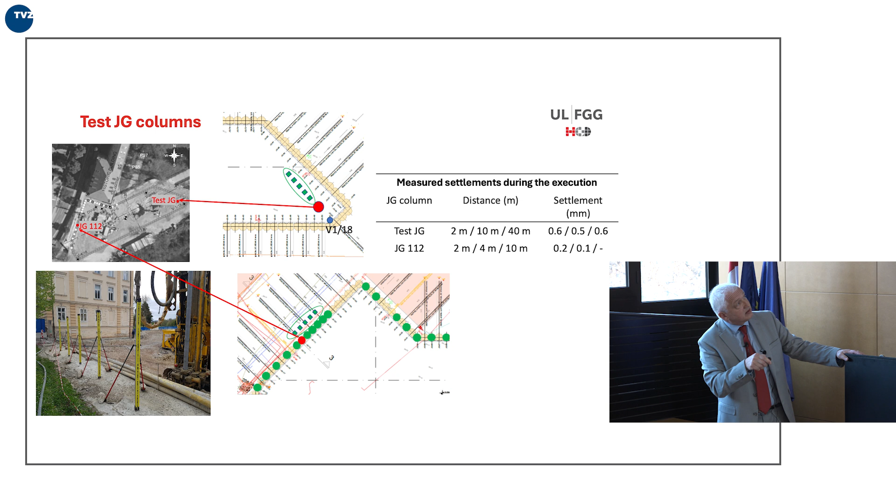This was one extra within the construction pit, and then this was one which needs to be done anyway. And it turned out that this one didn't have any effect, maybe 1/10 of a millimeter, but this one here, which is about 10 meters away from the building, contributed 0.5 millimeter of settlement to this point of the building.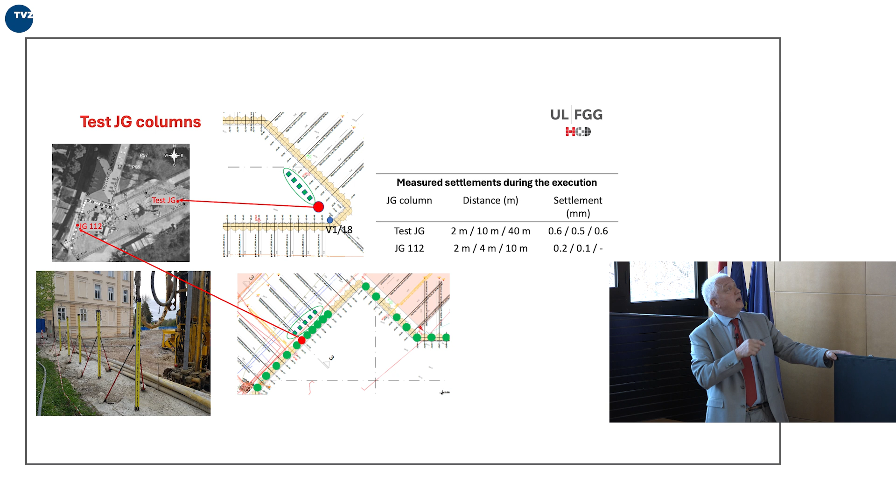So this was, again, a confirmation that in these particular ground conditions, the jet grouting performed several tens of meters away can cause settlements. And now the question, why? Which mechanism can transfer this displacement so far away?

From this paper that suggested that drilling and grouting in loose, silty gravels can cause reduction of volume, we did a very simple 2D numerical analysis along this cross-section somewhere in the middle, using very stiff material at the bottom, looser material on top, and then bedrock.

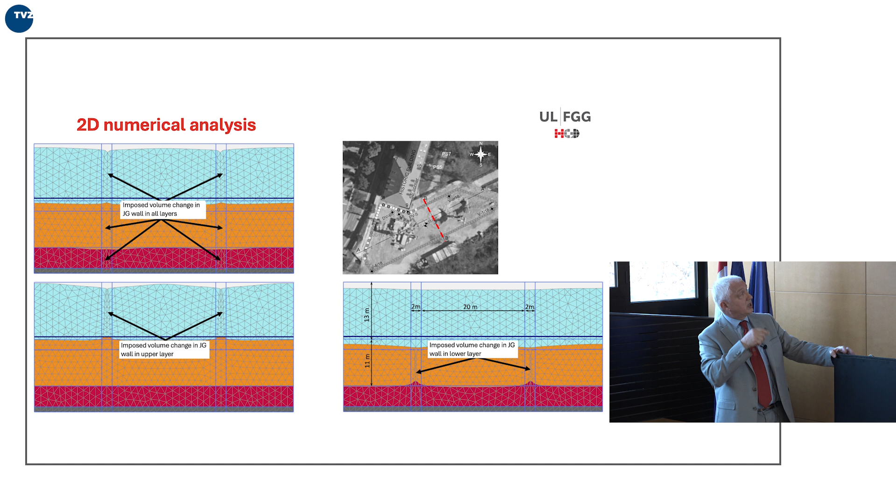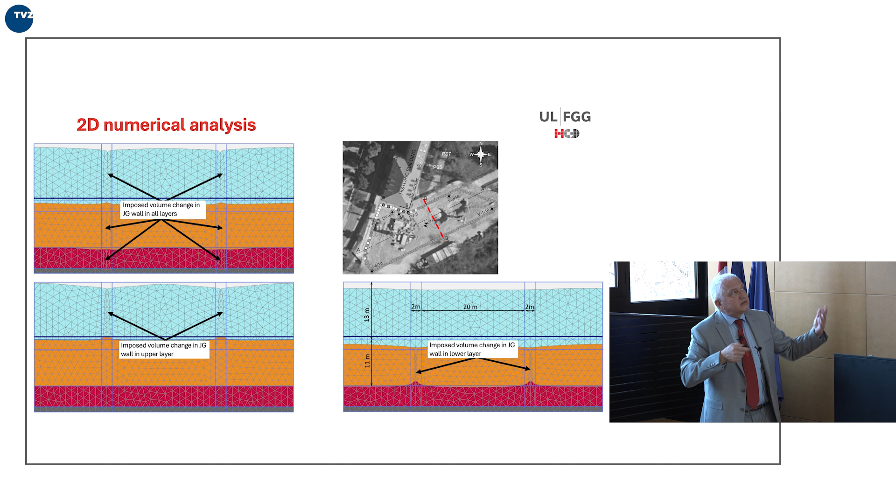And we imposed volumetric change first along the whole height of the jet grouting, and then only in the upper layer and only in the lower layer. And if we do this only in the lower layer, we can see that we get, well, not constant, but far-reaching settlements of the model, and altogether this explained what happened here.

But slowly we come to the conclusion. There are still some 7-8 slides, so don't be too happy too soon.

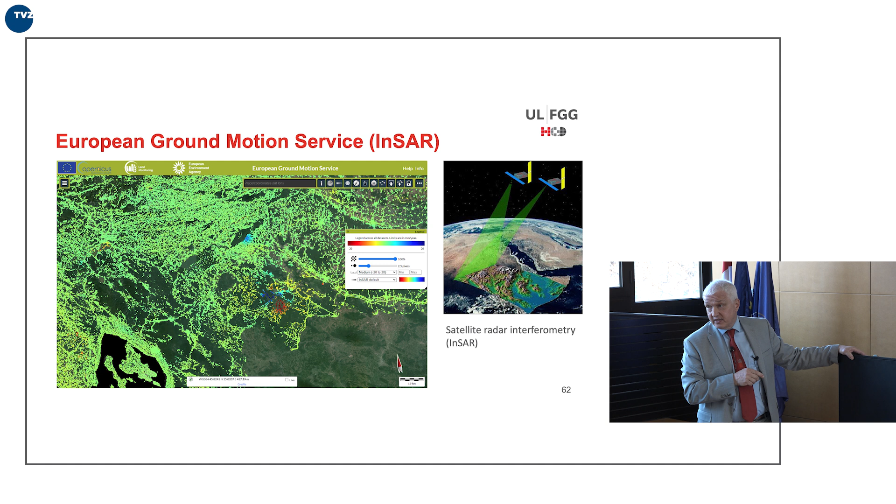European Ground Motion Service. When you open the map of our space, we see Ljubljana settlements, yellow and reddish color, Ljubljana marshland. You see the consequences of the Zagreb earthquake, and you see the consequences of the Petrinja earthquake. Well, I couldn't resist clicking on one of those points, and I've seen what I expected. So Petrinja: the blue color is heave, and the red color here is settlement due to the earthquake. Both are about 10 centimeters, and I just randomly clicked. So this is what you expect.

You have a certain state, then the earthquake, and then, well, the soil crust is moved and gets some new location. But then this point got my attention. I clicked some more points. It's always like that. Do you know that? Have you consulted this one? No. It's the 27th of December, actually, and the earthquakes occurred on the 28th and 29th.

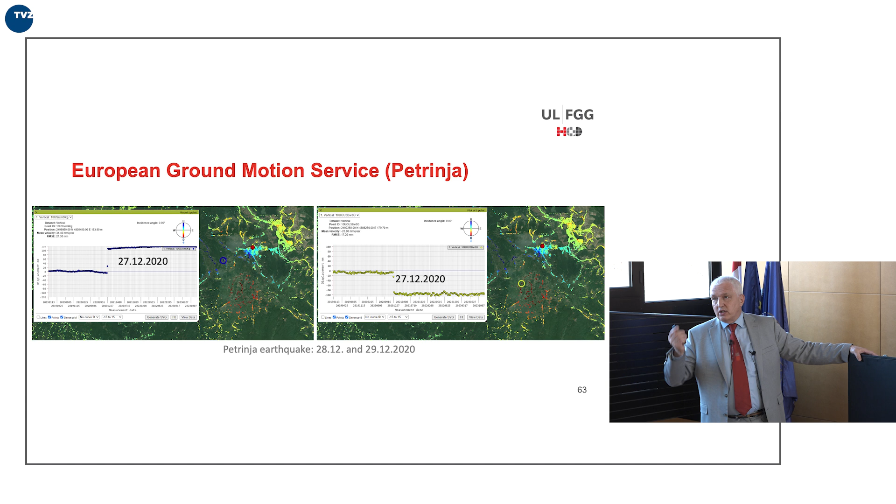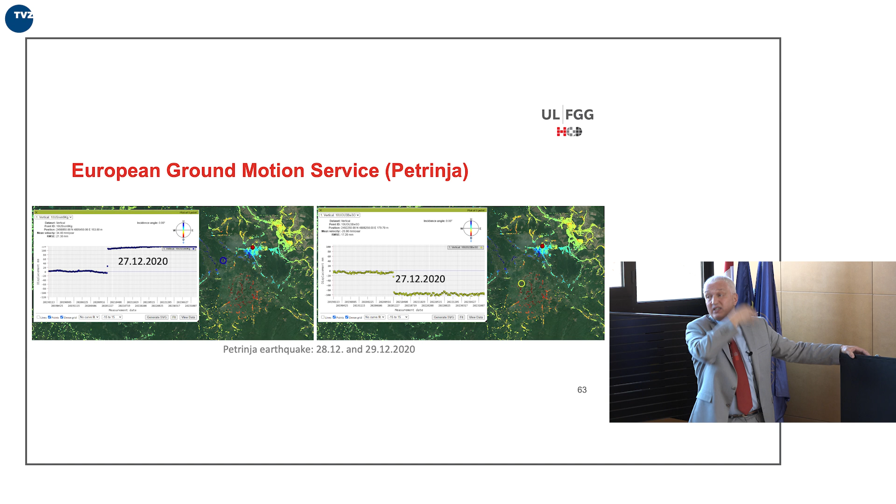I'm not saying that we can use these for predicting earthquakes, but it can be one piece of information that can contribute. And of course, each and every earthquake will behave a little bit differently. I did it for the Zagreb earthquake. You also have such a point here somewhere in between, but it is the day after the earthquake. Well, you only have a reading every 6 days, so this is the reality. This is how it works.

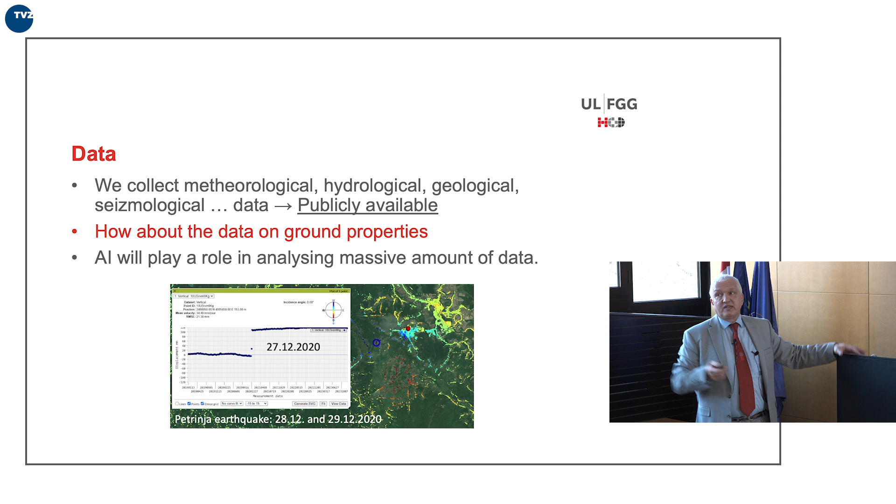Geotechnical engineering and many other technical disciplines are all about the data. We have collected meteorological data systematically for centuries, hydrological, geological, seismological, and most of these are publicly available. But what about the data on ground properties? We spend a lot of money on boreholes and other soil investigations, and this is, well, not publicly available, probably non-existent, maybe in some private archives. I know there are many problems with that, but we have to start. The younger generation is waiting for artificial intelligence to assist them in making decisions, but not without reliable data. We have to start to work on that.

Because if someone decides to look at these massive databases of radar images and try to understand if there is any connection with earthquakes, you cannot do it by hand. You need powerful computer tools that work more or less in real time if you want to at least think that some earthquake can happen, not to predict it. I don't believe in that in the years to come.

So I didn't say so far anything about artificial intelligence, and I won't. I just asked artificial intelligence, one of those large language models, please list all the papers written by Professor Nonveiller on the topic of Vaiont landslide and summarize his role in explaining what happened. And here is the result. He gave 4 papers that, with directly these words, don't appear on his bibliography, so they're not existent. Maybe it's translation from Croatian and so on, but in this form they don't appear, those 4 papers.

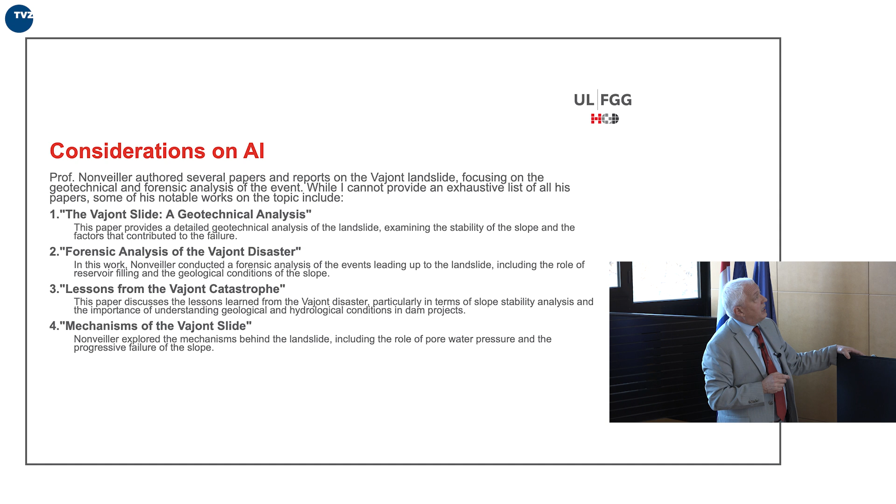Otherwise, if you read the text, it's wonderful. Professor Nonveiller authored several papers and reports on the Vajont landslide, focusing on the geotechnical and forensic analysis of the event. While I cannot provide an exhaustive list of his papers, some of his notable works on these topics include. It's so nice to read, isn't it? And then you have the second part of the answer. Professor Nonveiller played a critical role in the forensic analysis on the Vajont landslide. His contributions include geotechnical and so on.

If you just read one, for instance, lessons for engineering practice, again, it's so nice to read. Nonveiller's analysis provided valuable lessons for the engineering community, particularly in the design and monitoring of large dams and reservoirs. He stressed the need for thorough geological investigations and the importance of monitoring slope movements in real time. Perfect. So for a secondary school student, excellent. I mean, you cannot do better than that in writing.

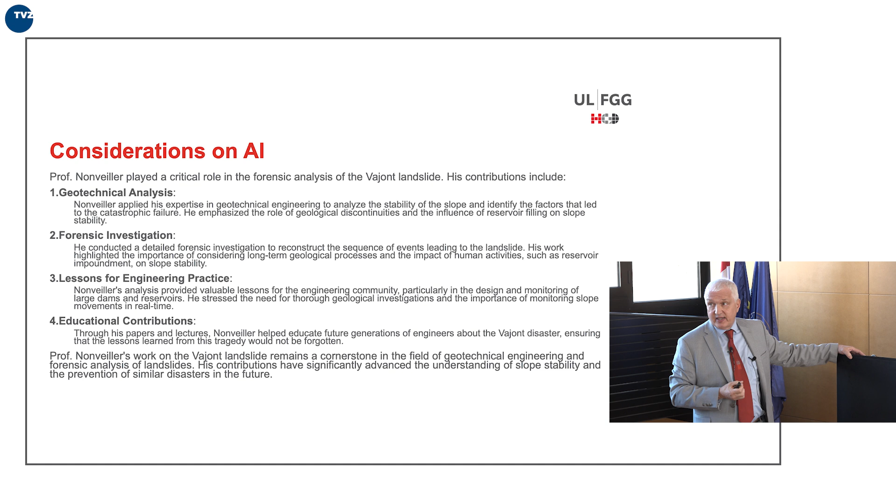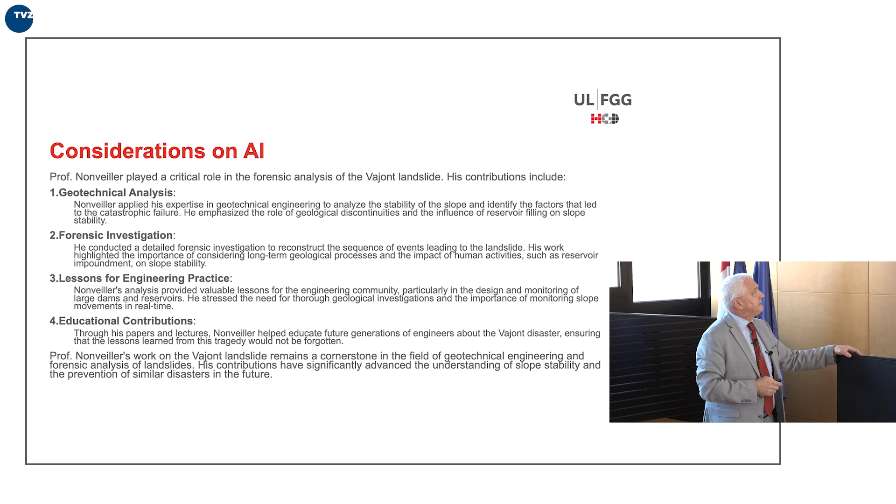And why I'm thinking it works so well, because there are gazillions of texts on the internet available for artificial intelligence to learn from. If we want to use artificial intelligence in geotechnical engineering, we'll have to work on data. And hopefully in 50 years, it will work perfectly, but not before we provide data. Yeah, we have beautiful tools now, computing tools, tools to manipulate and to analyze and to present massive amounts of data. So embrace everything. So use everything you can. But do not forget the fundamentals of good old practice.

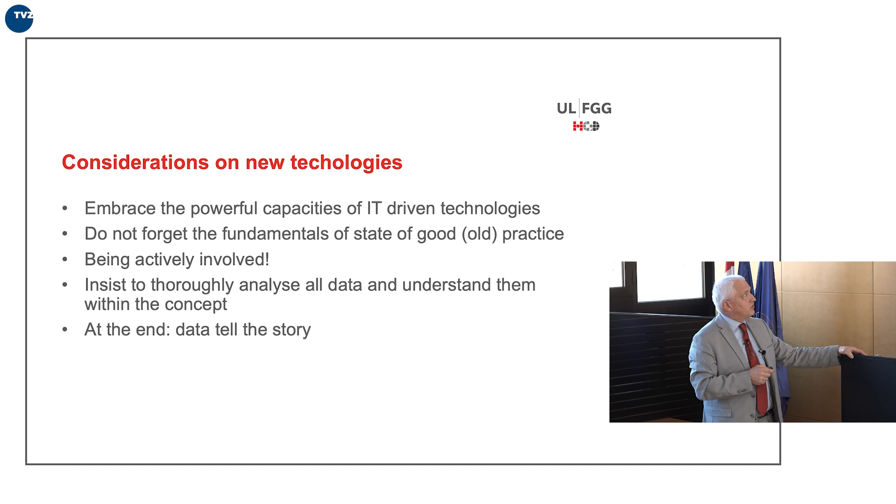So you have to put a problem in your brain. It is still the ultimate machine that we have. There is no better one, and it will stay like that for a long time. We must be actively involved in solving any challenge, engineering challenge. I mean actively, mean precisely that. With all your capabilities, try to understand, try to analyze, try to explain, and work on that. Insist to thoroughly analyze all data and understand them within the concept. Because at the end, when everything fits together, the data will tell the story. So when everything fits together, then you have it.

Professor Burland, one of the examples of professors in geotechnical engineering, wrote at least 2 excellent papers on education of geotechnical engineers. And he proposes to use, and he used during his lectures, this so-called geotechnical triangle. So he believed that the pillars of any geotechnical design are the following: ground profile, observed behavior, and appropriate model. So during this lecture, I have shown you something about how to get information about this ground profile. It's a flat dilatometer test with the seismic device.

We have seen the remote sensing tools that can give us data about the ground surface, but there are many traditional tools. Then observed behavior, we have seen again, SDMT, resonant column device. We have mentioned LiDAR. We have mentioned GPS and the fiber optic cable. And then appropriate models. We have plenty of models, but I don't only mean numerical models. I have shown you an analytical model on this shear modulus reduction curve. And well, it can be artificial intelligence.

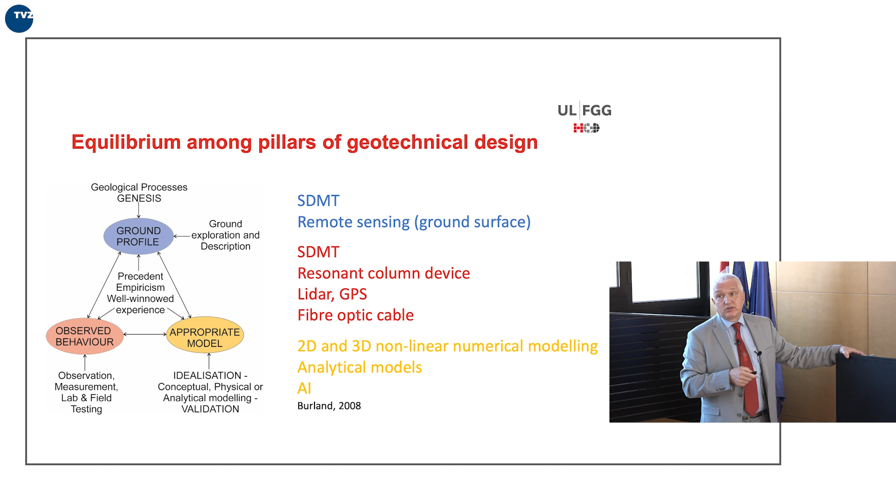Everything that can assist us, but it only assists us. We are finally the ones who will have to solve the problem. And we do it with our brain. Everything here is just a tool, and artificial intelligence is just yet another tool.